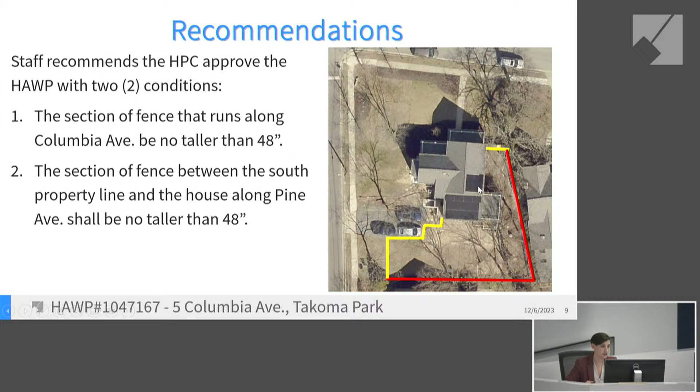The case was deferred from the November hearing, and the applicant prepared a response for the commissioners to consider. In response to the staff report, the applicant submitted written testimony attached to the application in your board book, identifying 4 factors for the HPC's consideration: the proximity of other tall fences at corner lots in the surrounding area, the existence of a 6-foot-tall fence along Columbia Avenue, the natural screening created by existing plantings along Pine Avenue, and finally safety concerns along Pine Avenue.

In looking at these factors, staff acknowledges there are several instances of non-conforming fences, but staff would remind the HPC that all HAWPs are evaluated on a case-by-case basis. Staff also recognizes that the existing fence along Columbia Avenue is taller than typically approved, but a fence has been in that location since at least 2003, and the existing fence may predate the district. In fact, many of the fences that are 6 feet tall or higher in some of these areas may predate the district, and we just don't have a lot of the permit information about when some of those earlier fences were installed.

The HPC is charged with evaluating HAWPs in the absence of vegetation, and while the screening will help obscure the fence, the HPC is not permitted to consider that factor in the HAWP evaluation. Finally, in terms of safety, staff does not find that the identified safety considerations satisfy...

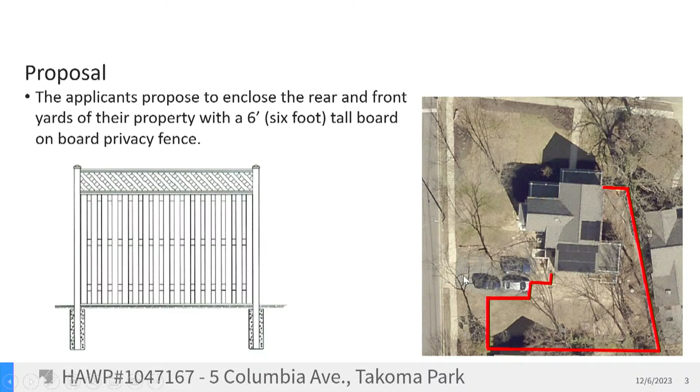And the same is true for the back of the property too? There's no fence back there either? There is a small one — I think it's in the staff report. It doesn't have a picture of it, but the staff report outlined maybe a 10-foot section of what appears to be a 3.5 or 4 foot tall fence at the back corner of the property, farthest away from the street.

Is there any reason this little 10-foot section in the front needs to be 6 feet tall? I mean, the other one you had some reason for, because of kids playing sports and maybe kicking the ball. But this little section up here — there's no real reason it can't be 10 feet, is it? Or 4 feet? Other than just aesthetic consistency, I suppose, no.

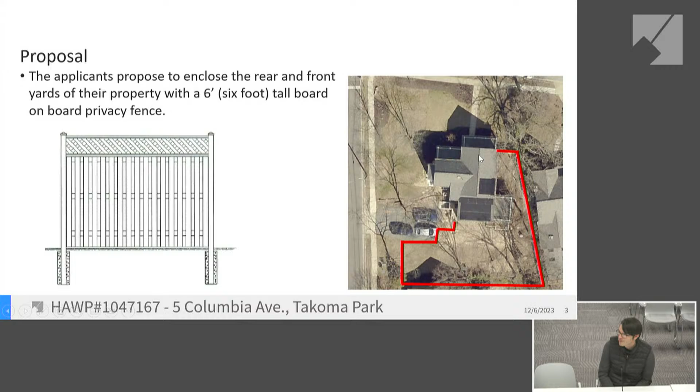Okay, and on the other side, which I guess faces — what street runs along here? That's Pine? Pine Avenue. Pine Avenue.

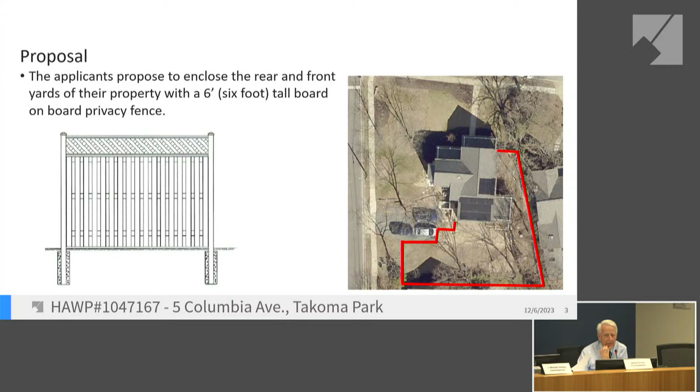Currently you have a net that goes up, is that what you use, something like that? Yes. The kids are practicing kicking soccer goals, something like that. Yep. So you need a pretty good fence, I think, presumably? The net is tall and covers that one area immediately abutting Pine Avenue. And then our cars are parked in the driveway and things sort of slide through that other remaining area. But yes, the fence is good, the net's quite tall.

Could you, I mean, the recommendation from staff is 4 feet. Could you work with 4 feet with a temporary net that sits on top of it? Something you could work with to get the height you want to prevent balls from being kicked into the street? I understand the spirit of the question, and I think our main objection is just what that would look like aesthetically from the street, having the two different heights.

So if you were walking down Pine Avenue, you'd see a short 4-foot fence design, and then immediately behind it, you'd be able to see that higher elevation. I also think, which is a secondary concern, I've seen a lot of 4-foot picket fences, but I've not seen a lot of 4-foot board-on-board fences with a foot of lattice on top, and I think it might look a little awkward. But that's just a subjective thing.

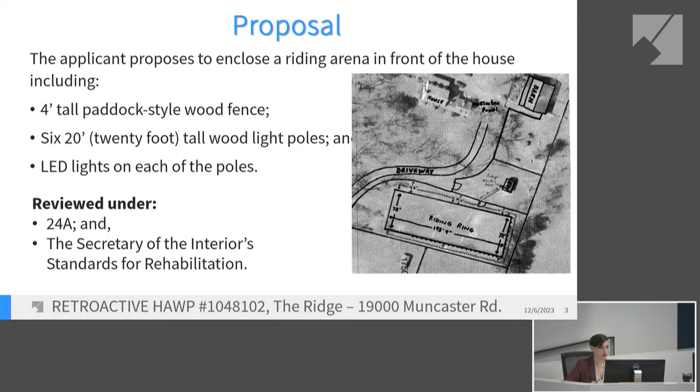Staff finds that the proposal, as outlined in the application, is consistent with the zoning requirement for equestrian facilities. This is about the lighting. Within the applicant's presentation materials, he noted that they would be complying with the zoning prohibitions that the lights are not to be turned on after 9 p.m. Sunday through Thursday and after 10 p.m. on Friday and Saturday, and that the light must direct downward so that 0.0 foot candles are measured at the property line. Those are the lumens.

That's the lumen measurement. In terms of the riding arena itself, staff finds that a riding arena was installed at the property in the approximate dimensions proposed in this HAWP between 1986 and 1993. We don't have any permit records for that, but it has been in place for at least several decades from what we could tell from the aerial photographs.

At a November 8th site visit, staff observed again that the light poles had been installed, but staff finds that the wooden light poles do not detract from the character of the site, and they may be removed in the future without permanently damaging the character of the property.

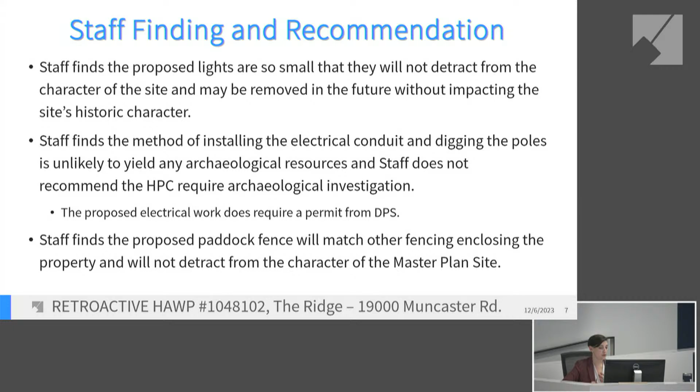Staff does note that the proposed electrical work does require a permit and an inspection from the Department of Permitting Services, and staff has reminded the applicant to follow up with DPS about his required permits. For the fencing, staff finds that the proposed paddock fence will match other fencing enclosing the property and will not detract from the character of this rural master plan site.

Additionally, staff finds that this is the second HAWP within as many months where the applicant has begun work before receiving the HPC's approval. Staff finds that the proposed work is consistent with 24A8B2 and standards 2, 9, and 10. However, staff recommends that the HPC add a condition to the approval of this HAWP that the approval documents for the current HAWP not be released until the condition for the previous HAWP has been satisfied.

To remind the board, the previous HAWP was for the after-the-fact installation of a shed in the rear yard, where the HPC conditioned that approval upon changing the siding that had been installed. So once staff has been able to verify that the siding has been changed and the HAWP for the shed has been released, then staff would ask that the condition be adopted, and then we would release the HAWP for this proposal that we have here tonight.

And that concludes my presentation. I'm happy to answer any questions.

Any questions for staff? Commissioner Doman? Do you know the status of the shed? Has the siding in fact been done, or maybe that's something that the homeowner can address? I do not know, but the owner is here tonight. I'll ask him.

Any other questions for staff? If not, I would ask the owner, I believe the owner, Richard Miller, to come forward. And if you could turn on the microphone and give us your name. You will have, if you would like, 7 minutes to do a presentation, or if you'd prefer just to answer questions, that's fine as well.

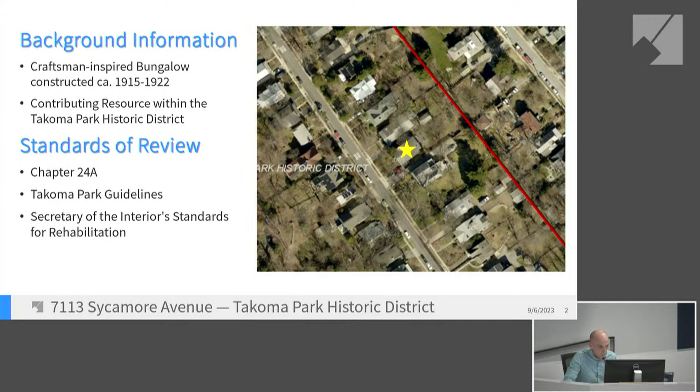Here is an aerial image of the house showing the subject property and roof forms. And here is just some contact information for you all.

So for tonight, the applicant is proposing to raise the ridge of the side gable roof approximately 34 inches, to construct a second-story addition on the rear slope of the historic house, to replace the asphalt shingle roofs on the front half of the historic house, to extend the existing chimney here, and to replace the upper gable end windows on the side elevations of the original house here and here.

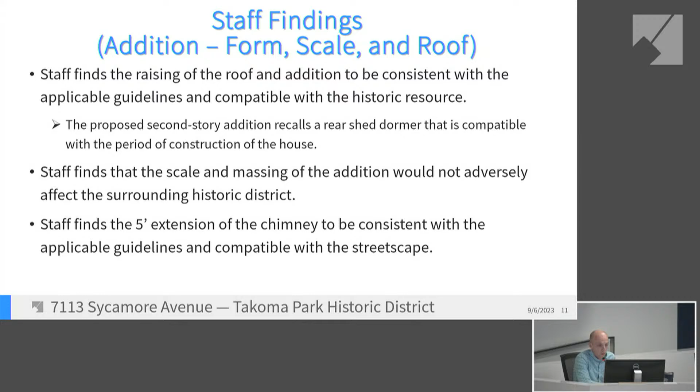Overall, staff's findings are that the raising of the roof and the addition is consistent with the applicable guidelines and compatible with the historic house. Staff finds that the scale and massing of the addition would not adversely affect the surrounding historic district. Staff finds that the 5-foot extension of the chimney is consistent with the applicable guidelines and compatible with the streetscape. In terms of design and materials, staff finds the design and materials of the new addition to be consistent with the guidelines.

As stipulated by the guidelines, the proposed design continues the architectural style of the house. However, the addition is differentiated by its use of cedar shingle siding. Staff requests additional detailed drawings for the treatment of the ridge. On the rear slope of that side gable roof, it's going to be standing seam metal, and we'd like to see a detail about how that interacts with the front asphalt shingle.

And when they submit for a HAWP, that all specification sheets for the siding, the roof, and windows are included with future applications.

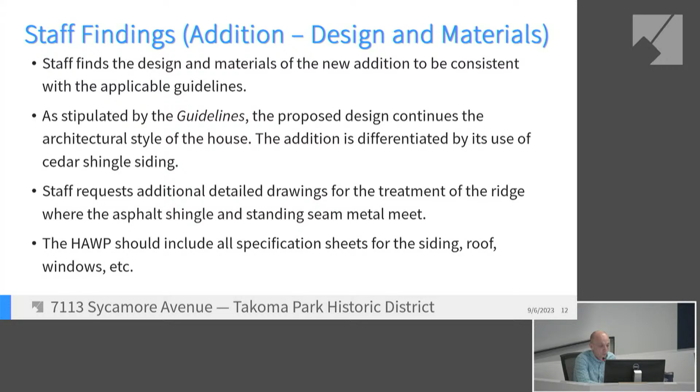Lastly, for the window replacement in the upper gable end, staff finds the replacement of these awning windows to be compatible with the applicable guidelines. The windows are presently located in unoccupiable space, and replacement with an aluminum-clad wood window of similar dimensions and design would have a negligible adverse effect to the resource and surrounding district.

So staff is requesting HPC feedback on the overall design, concept, and form, and if there are any opinions about the different options for the demolition of the sunroom roof rake or its retention. I'd be happy to answer any questions.

Any questions for staff? Commissioner Galway? This is Commissioner Galway. I missed something when it came to the roof.

You mentioned the asphalt replacement, and I assume it's existing asphalt. Then, as a subsequent point, you mentioned the standing seam—which is which, and where is it? So on the front elevation, this entire asphalt shingle roof would be replaced with asphalt shingle, pretty much for consistency, so you wouldn't see a seam between the old asphalt and the new. But on the rear shed dormer they're creating with the rear addition, the applicant says due to the pitch they're proposing to put standing seam metal. So from the side elevation, this side would have asphalt, and this side would have standing seam metal.

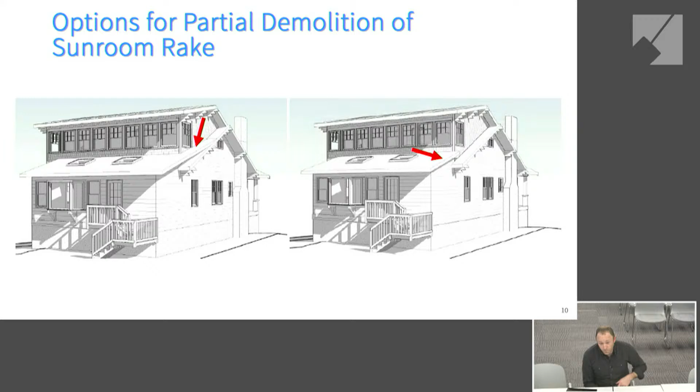The house actually is a significant height above grade, maybe 10 feet or so from the first floor to where I think the street is. And so the reason we're creating this space, the owner—this is actually just a one-bedroom house. It's got one bedroom on the first floor, maybe a little den that could technically be a bedroom, but it just has one bedroom, a semi-finished basement, and then the current uninhabitable attic with 2x4 roof framing.

We talked about doing a rear addition, but we didn't want to encroach on the backyard, which is well landscaped and has a nice garden, and also any rear addition would significantly reduce the natural light coming into this rear sunroom with those two skylights and then the kitchen further into the house. So we thought that while we're doing the roof repairs or reinforcement, that's the place where we could create the additional bedroom, the additional habitable space.

So we realized we were going to have to raise the ridge, and I tried to minimize that in two ways. One, the rear wall plate height is only 7 feet right there. So with all those windows, it's at 7 feet, but it's going to be a cathedral ceiling, so the height of that room will raise as it goes towards the front of the house. And then doing a metal roof on the rear allowed me a lower slope, which also helped reduce the ridge height as opposed to making that a 3 or 4 in 12 slope that I'd need for an asphalt shingle roof, which would raise the ridge height even more.

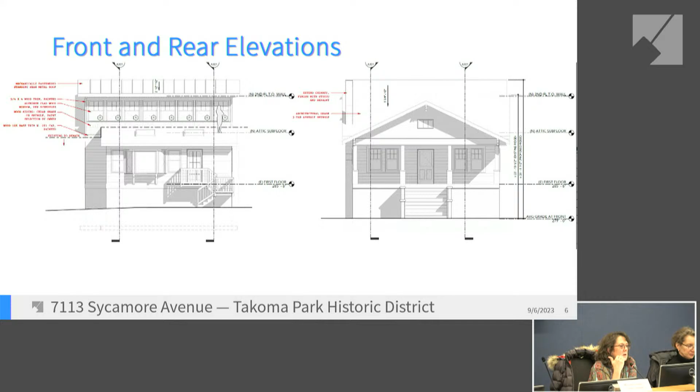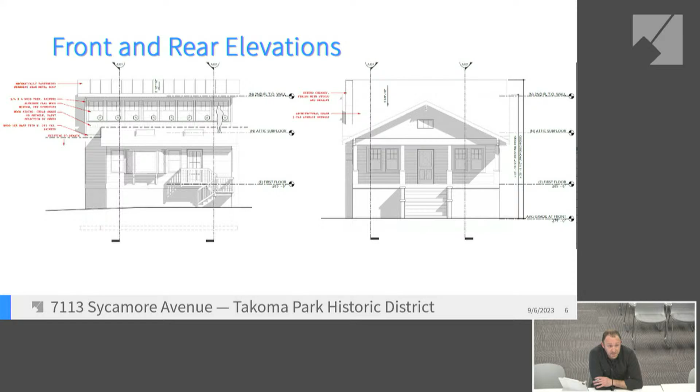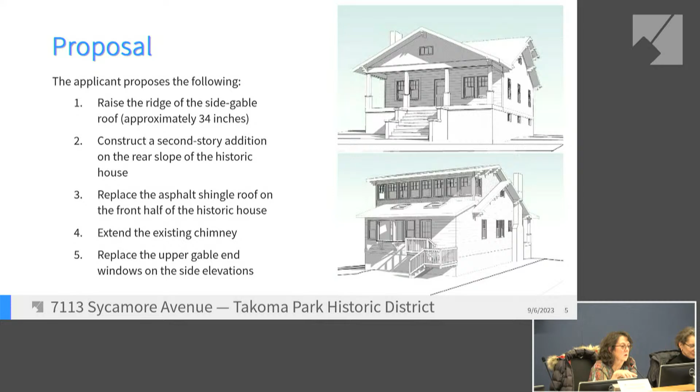I think that's one of the things in the examples that are in the staff report. All of those extra roof pieces that are coming up and coming back down, they all have the same slope as the existing house. That was, I think, even too high for my taste, and I can send staff a view of what that would look like, but that would more than double it. So right now, the rear, as shown, is 2.5, and the existing is about 5 and 3/4. So if I doubled that slope, we'd be going up another 2 or 3 feet, I think, from what we're showing right now.

Yeah, but is that so terrible? I guess I don't understand the need to keep the ridge low when you're going to end up with kind of wonky roofs and different roof types everything in the back. I'm just questioning your concern about the height of the ridge. That's all. All right, thank you. Thank you.

Any other questions for Mr. Norkin? Commissioner Burdett?

Going back to the roof, the standing seam is used because the pitch is so low that it won't drain properly with asphalt, or it doesn't meet code. Correct, I think asphalt is typically not recommended, certified, or warranted under a 3 in 12 slope.

So I'm a little curious about what the detail's going to look like at the ridge line. It would probably be a conditioned attic, so there's no ridge vent. Any piece up there is strictly just for guarding that seam against water. So it'd probably be a metal ridge cap, whatever the metal is—if it's steel, it's probably going to be a steel ridge cap, along the whole length.

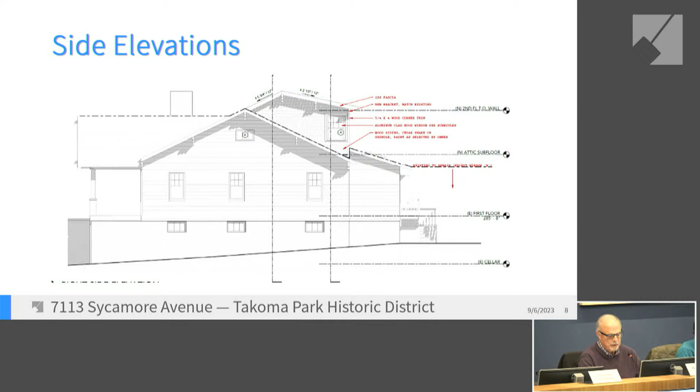Well, so you know that this is one of the services that we provide, to try to give you what we think will be a project that we can approve with an HAWP later on. And so with that, I'd like to have deliberations—what we think about your proposal, and whether we think it's okay or not, and what we would recommend to you.

Anyone like to kick it off? Commissioner Doman—yes, this is Commissioner Doman.

I think you've addressed most of the concerns with the staff. I think the staff report pretty much covered everything, and I think you followed their recommendations. If you've been here before, I don't know if I remember you or not, but I think you know what to expect when you come in here, and how to work with the staff. I think you've done that, I think you've done a good job. I have no problem with it.

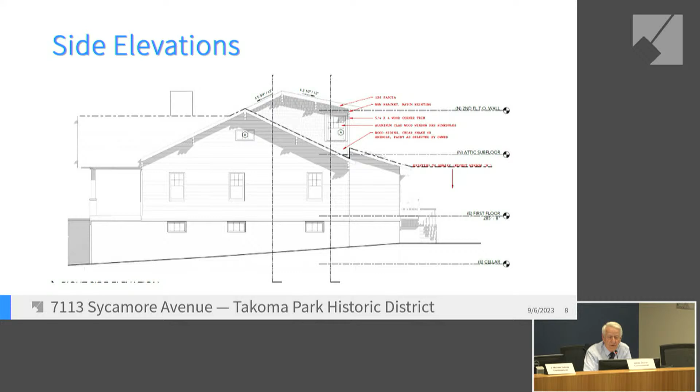I would like to see a streetscape to see how this looks relative to the other houses on the block, because you said this sticks up pretty high anyway—the first floor is maybe 10 feet above the road, is what you said. So this is going to make this look really tall, but then again, I can't tell because I have not actually been down the street to look at the houses.

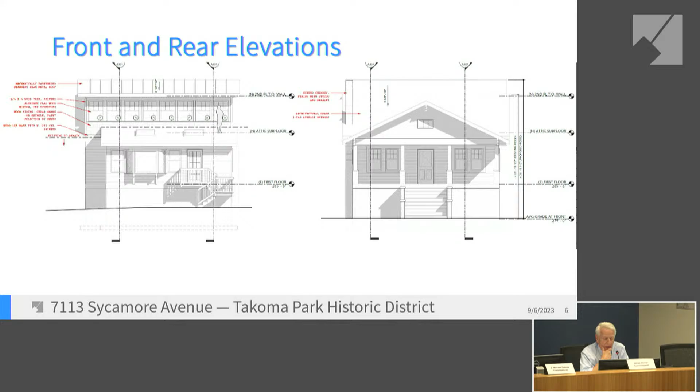What else was I going to say? Anyway, you gave two options, but I think you pretty much eliminated one of the options because of interference with the window, so I think you've resolved that issue. You came with option A and option B, and one of them was kind of eliminated already, I think, so that's been taken care of. Other than that, I have no other problems with this.

Thank you. Anyone else? Commissioner Galway? This is Commissioner Galway—in general, I could certainly accept your design.

I think that from the overhead and the roof, raising the roof, I don't see that creating a very large volume of space or a large building that would be overpowering compared to the other. So I think the massing seems to be okay.

I guess if I had one quirky thing, it's your metal standing seam roof on the backside, because of the low pitch and low slope of that roof. That's very awkward to me.

If you said it was 2.5 over 12 right now, and if the asphalt minimum is 3 over 12, maybe you cantilever — if you're stuck with the ridge beam being where it is, maybe you extend the cantilever up past it a little bit.

I don't know if we're talking another 4 inches or 6 inches in height, but it seemed like, man, just to get it up high enough, I wouldn't want to go up and double the pitch. I think that would be too much and make the height, like you said, 2 feet or so higher.

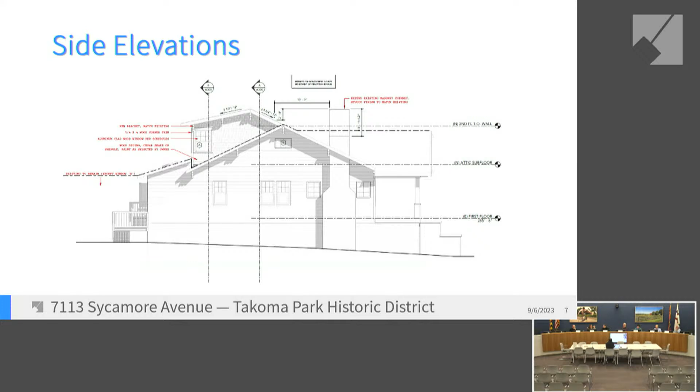I know I already stated my concerns, but I drew this out while I was at work, just to see where the pitch — if you mirrored the pitch on the back, it looks like it might be another 2 feet.

Maybe 18 inches or something higher.

But I think I agree with Commissioner Radu — if you're going to keep the roof at that pitch, I feel like the dormer has to be separate somehow.

Like you're starting to do with that stucco on the side of it — or is it going to be shingle? It's going to be cedar shingle or shake. Okay, cedar. So it has a different cladding on it.

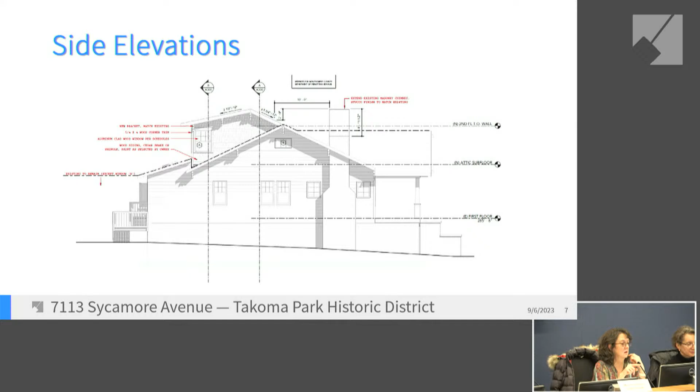I think the brackets aren't appropriate if it's a totally different architectural feel. I agree about the window because I like your second option on the existing roof, the one that turns the corner and goes back up.

Is it the first? No, the one on the left there. I think that somehow seems more appropriate than the other one — that one looks truncated somehow.

And I don't know if you've talked to a structural engineer — I don't know if you're going to get away with turning both of those corners with windows, because you're probably going to have some kind of stiffener at the corner. I don't know.

But I'm not crazy about the windows on the sides, and I would nix the brackets. I would maybe bring in the overhangs if you don't need such big overhangs, since everything's inset on the back.

I'm just trying to make this feel more like a shed dormer, because it seems to be suffering an identity crisis between being part of the house or something new. If you don't want to change the pitch on the roof, then the whole thing needs to be detailed a little differently. Nix the brackets, bring in the overhang, so it feels more like an addition. I can show you my sketches later if you want. That would be my suggestion, because the examples shown had the same roof pitch, and it blended better into the existing house. So that's my recommendation.

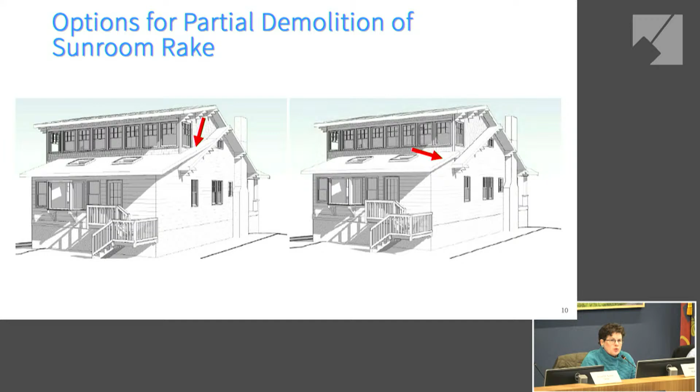Thank you. Commissioner Burdett? I feel for this owner. My house is almost identical to this, and I know exactly how difficult this is. We looked at another project a few years ago where they just raised the roof up to get that second floor, and I wasn't real crazy about that because it really did change the appearance of the house. So between your option and that option, I'd still go with yours.

But I do agree with Commissioner Pelletier that I want to see that back room pulled in on the sides a little bit so it looks more like a shed dormer than just pushing back up and over. I'm really curious about how that detail is going to look between the standing seam flipping over into the asphalt. That's just going to sound interesting. But all in all, I don't have a lot of problem with this.

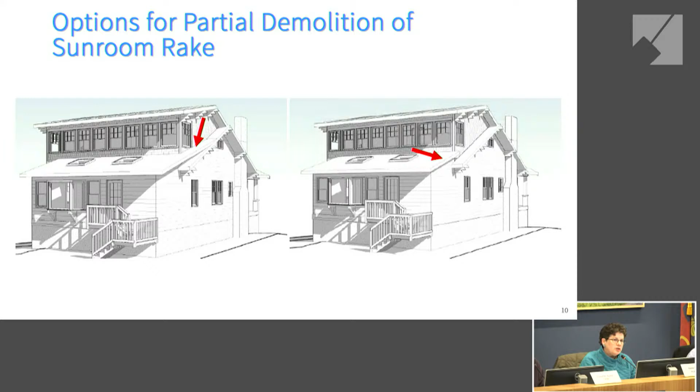I think the side windows are going to be wonderful, light coming through, even if the property isn't that well wooded. If something can be done about those windows, I'm not sure they have to be exactly the same size as the others, but that's neither here nor there. With a little tweaking, when this comes through, I could support this. I think you've done what you can with a house with an attic this small, and good luck with the rafter framing and floor framing.

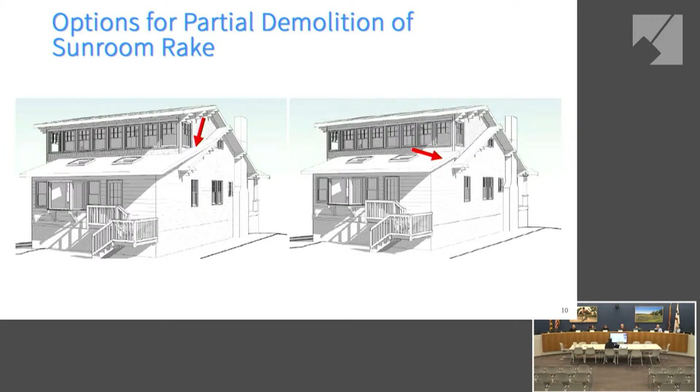Anyone else? Commissioner Nasser, I don't want to leave you out if you want to add something. This is Commissioner Nasser. I agree with Commissioner Burdett and Commissioner Galloway. In general, I support the project. I don't have any problem with the massing. For the side windows, looking at the plan, maybe you can have some smaller windows that are raised a bit to get the light but keep the dormer feeling. I'd also really like to see the detail of the two roofs meeting. In general, I think this is very appropriate in height and mass. I support it, thank you.

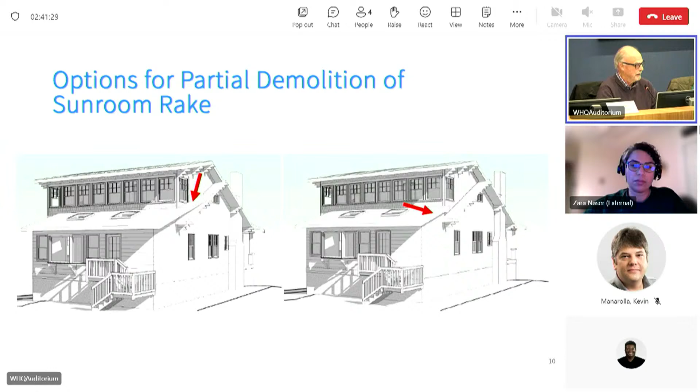And I actually like it. I think it would fit in well with the neighborhood. I haven't been there recently, but it looks like several of the houses on the block are quite a bit larger, and this is very small compared to the rest of the house, so I think it fits in well. Part of what I'm looking at is that living in a one-bedroom house is tough, and they definitely need more space. I think this is a very appropriate way to develop the space, so I would support it. I'd consider the other issues raised, but I would generally and strongly support this project.

So thank you. Anyone else? Does that help? I hope that was helpful to you. It was helpful. Great, thank you very much. Thank you. Okay.